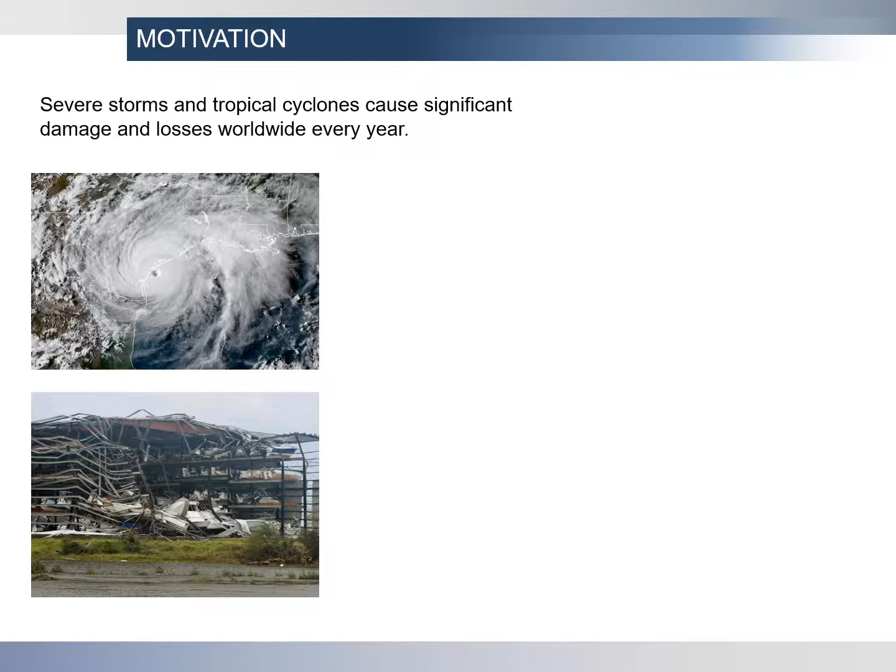Every year, many regions around the world are affected by severe storms and tropical cyclones. Damage to structural and non-structural components have summed up to a very high economic loss. For example, the U.S. has lost almost $300 billion to wind-related events in 2017, and this is 10 times more than losses to other natural disasters combined in that year. This has motivated engineers and researchers to find ways to improve structural integrity.

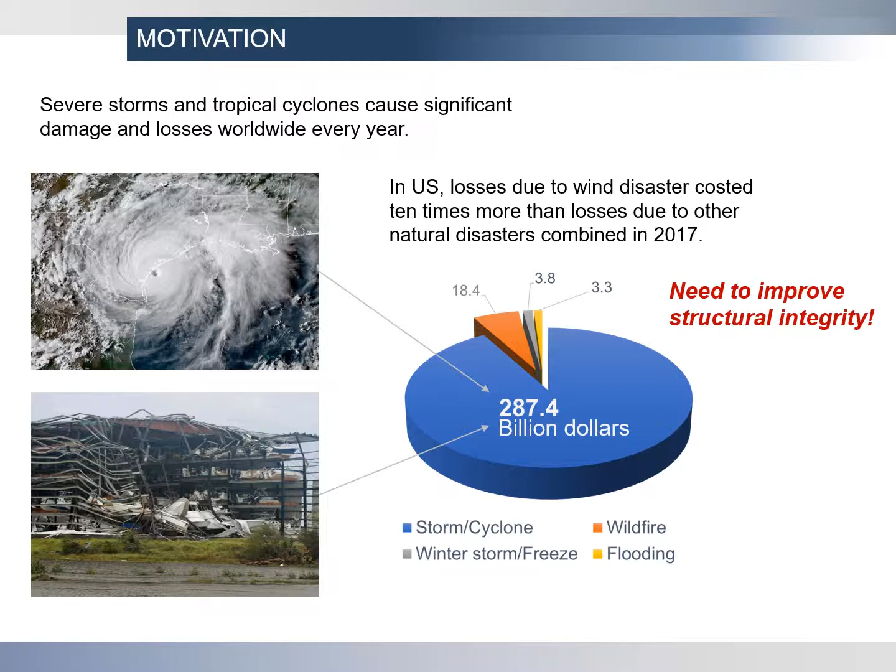However, high-performance designs are more likely to result in higher initial cost, and therefore it is also important to identify the optimal compromise between the upfront construction cost and risk mitigation.

To ensure system performance, performance-based design approach can be used to evaluate system performance in terms of expected loss and variability in the system level loss, which is the indication of robustness of the system. At the same time, optimization technique can be used to identify feasible designs with a minimal upfront cost.

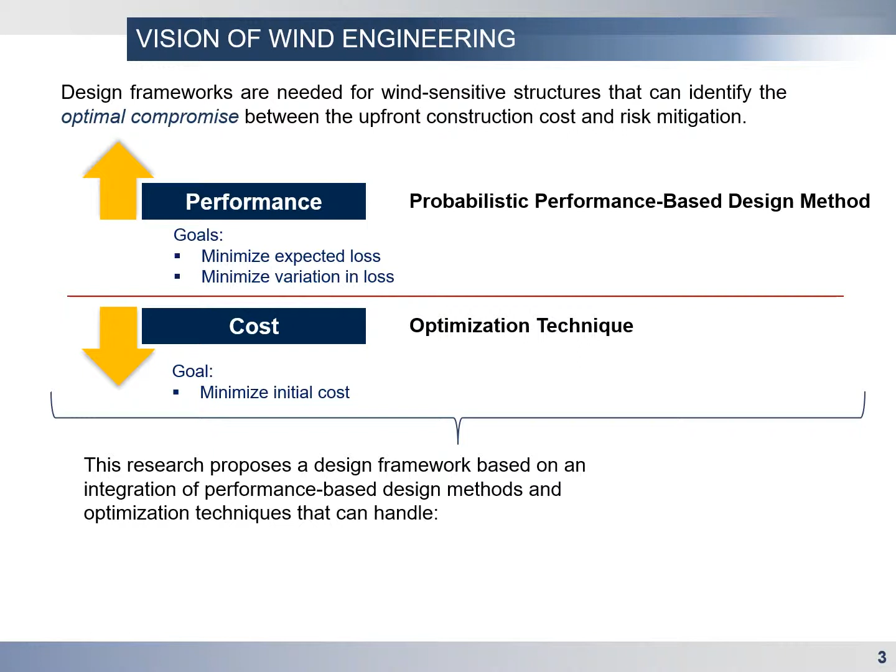This has brought us to the proposed design framework that is based on integration of performance-based design methods together with optimization technique that can handle multiple objectives, uncertainties in the systems, and a large number of design variables.

Due to the conflicting nature of the initial cost and anticipated loss, it would be very useful for decision makers to see the complete picture of trade-offs through the Pareto optimal solutions. Hence, it is of interest here to solve optimization problems in the multi-criteria setting.

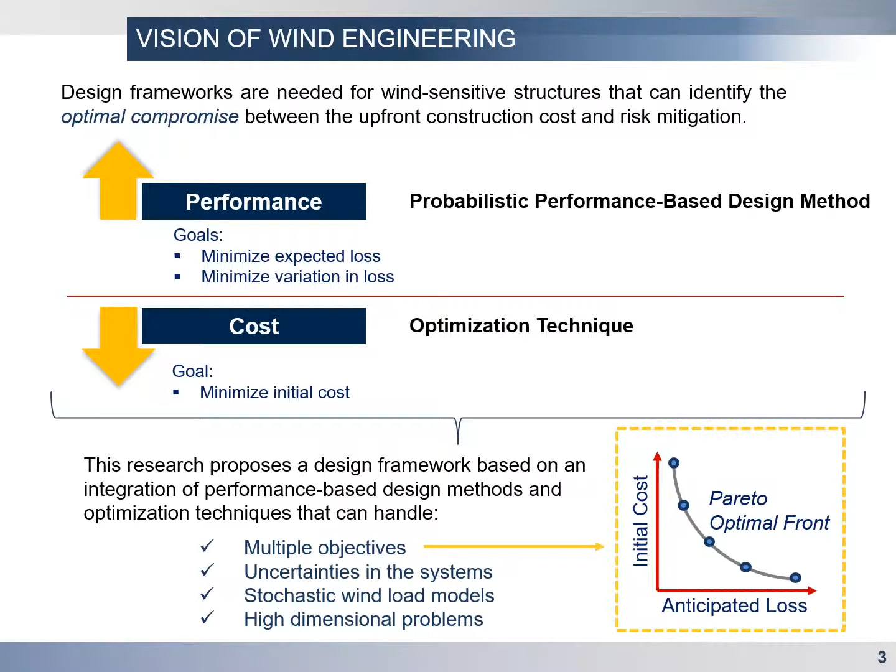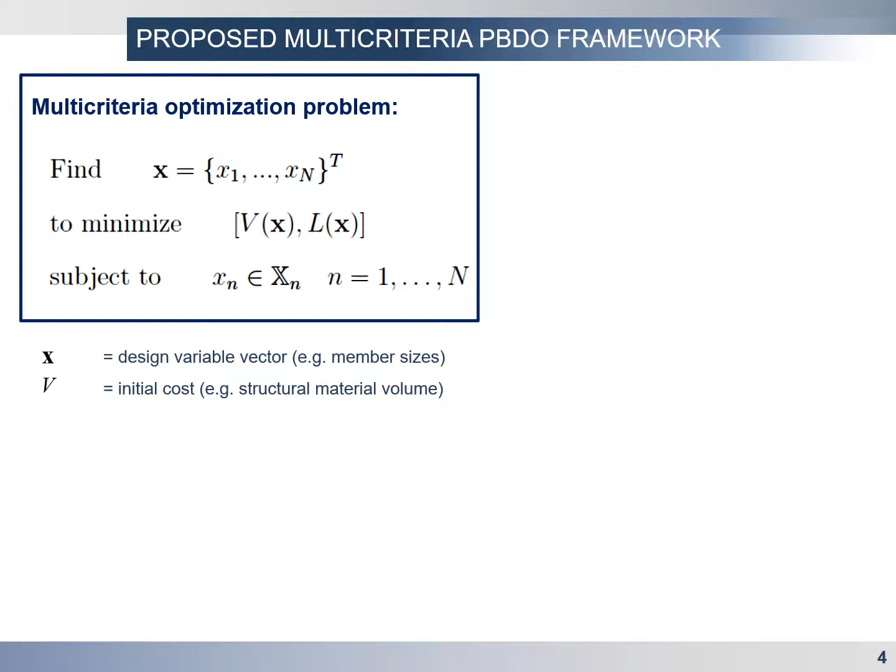The multi-criteria optimization problem may be formulated as follows. X is a high-dimensional vector that collects design variables such as member sizes. V denotes the cost function, which may be taken as structural material volume.

L represents loss measure, defined here as the combination between the expected value and the standard deviation of the decision variable, such as the total repair cost.

A parameter alpha is introduced here as a robustness parameter that allows decision makers to choose the level of robustness that they prefer. The higher value of alpha results in tightening the variability of the system level loss and therefore leading to a more robust design.

To estimate the expected value and standard deviation of the system level loss, performance-based wind engineering frameworks can be used. Starting off with identifying the intensity measure through the hazard analysis, then we perform aerodynamic analysis to estimate the wind loads on the system.

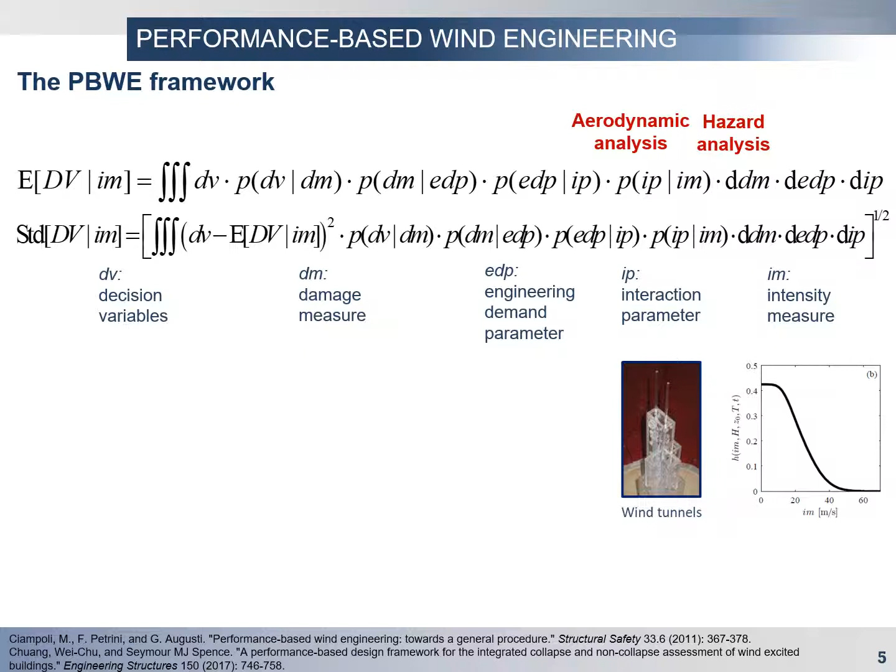Followed by structural analysis to estimate the responses and engineering demand that will be used in identifying damage to the components in the system. By summing up all components' repair cost and time, the total repair cost and repair time can be estimated.

This allows us to estimate the system level expected loss as well as the standard deviation, which tell us how the total loss varies around its mean value.

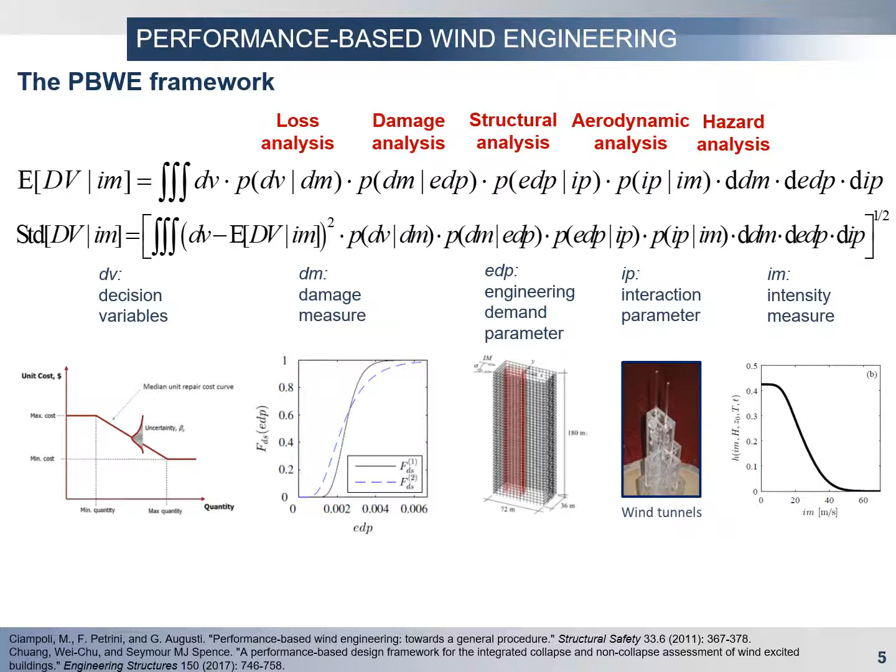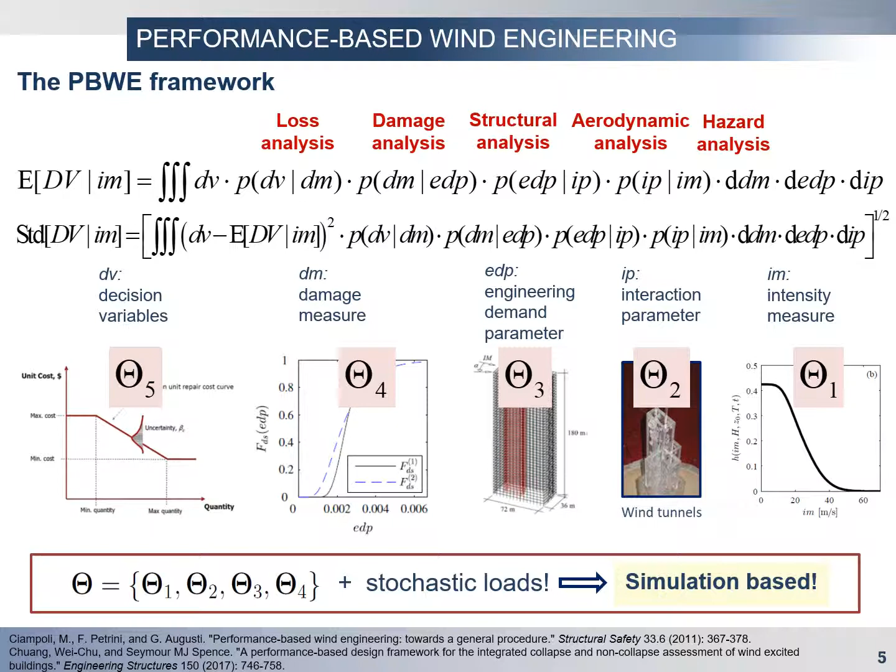It is also important to account for all uncertain parameters involved in all analysis steps. Together with stochastic wind load, these integrals can end up having thousands of dimensions, and therefore it is proposed here that they should be solved using numerical simulation.

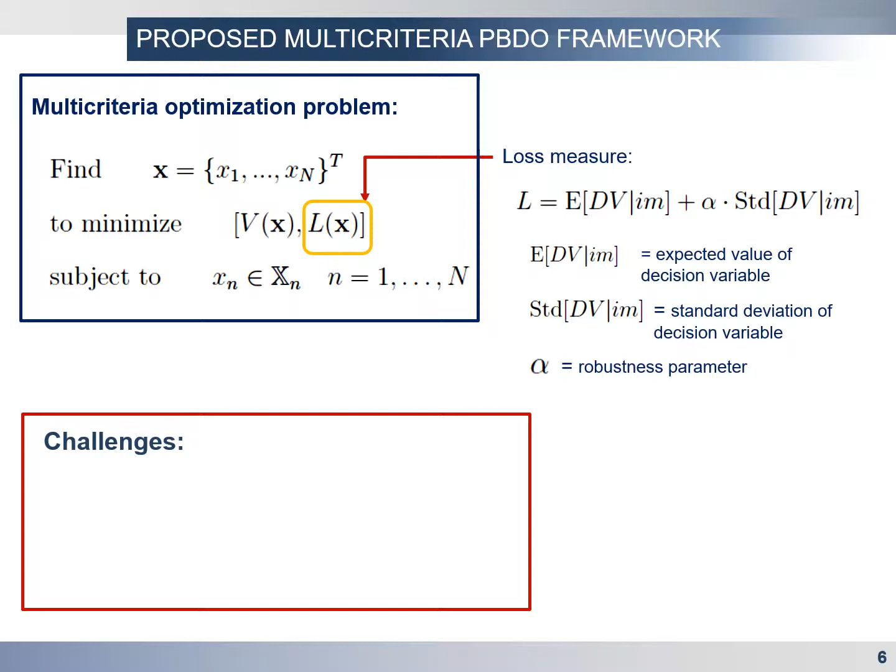This optimization is very challenging to solve because not only does it involve multiple objectives, but also one of the objective functions is in terms of the probabilistic loss measure that requires a time-consuming simulation. And for practical systems, X is also high-dimensional.

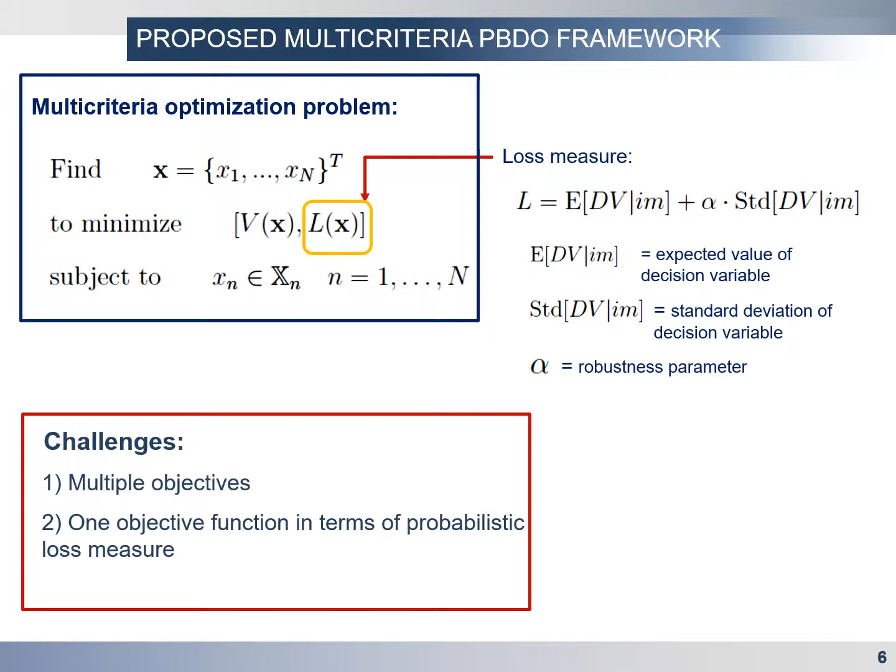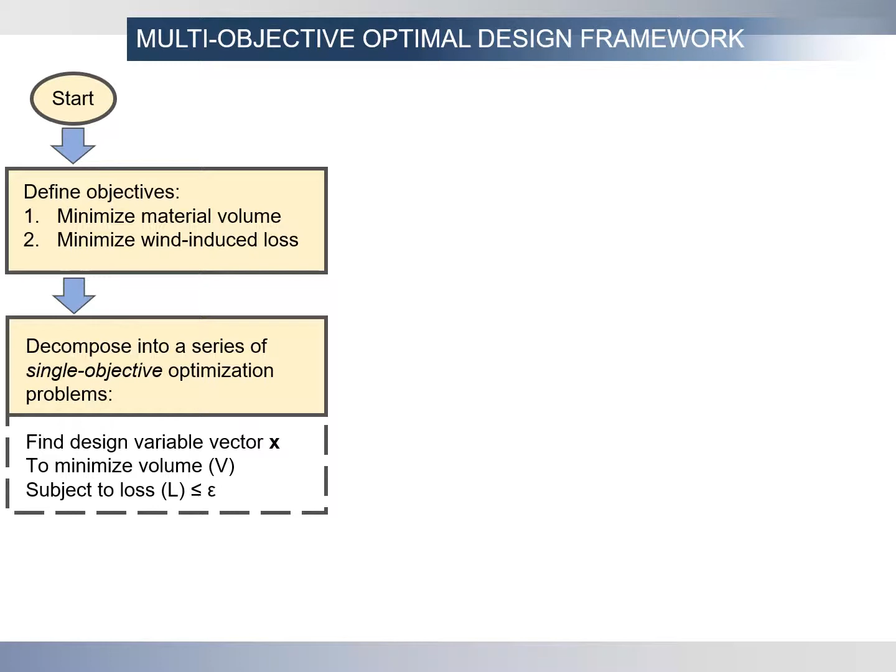To solve this problem, we first decompose the original multi-criteria problem into a series of single-objective optimization problems through the epsilon constraint approach. For each epsilon constraint problem, the simulation-based performance assessment is nested within the optimization process, so it is still time-consuming when we have to carry out a Monte Carlo simulation for every candidate design.

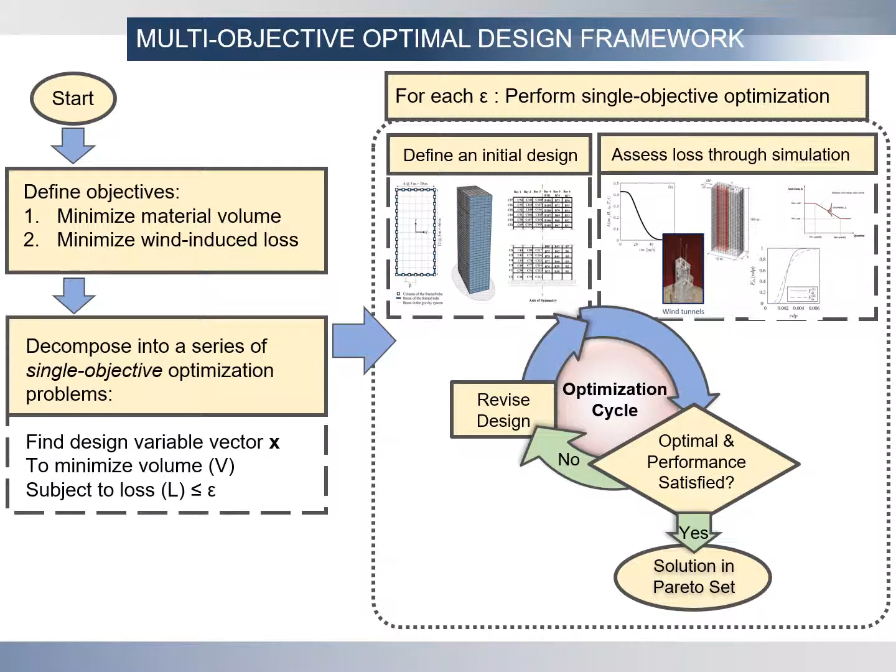To efficiently solve this single objective problem, we would like to decouple the simulation from the optimization process through defining an approximate optimization subproblem. In particular, we would like to have a computationally cheap approximation scheme to estimate the loss measure as the design changes.

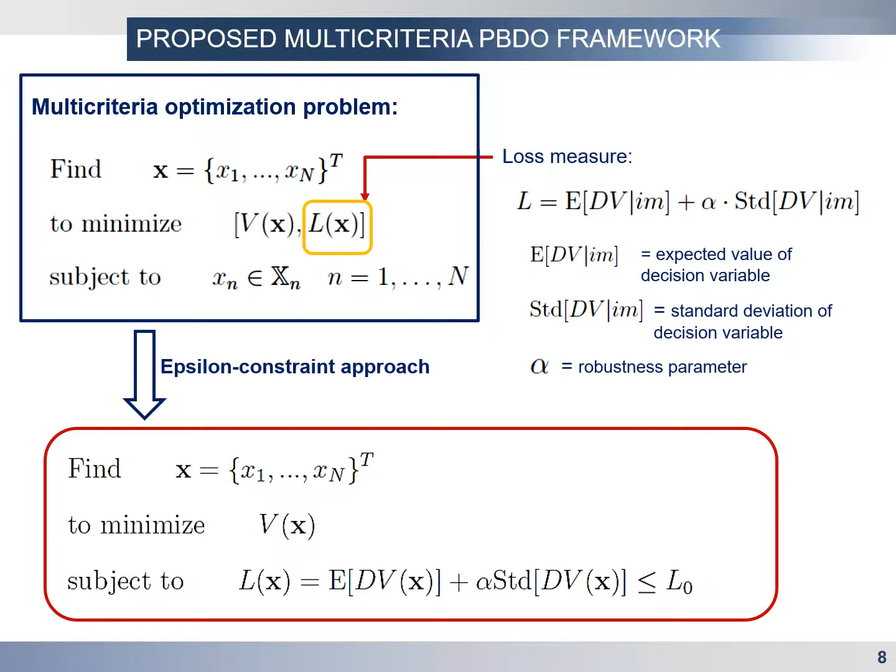To do so, it is proposed here that the problem can be divided up into 3 steps. The first relates design variables to the mean and standard deviation of the engineering demands, which are then related to the mean and standard deviation of the loss in the corresponding performance group, referred to here as the group level loss. Then the mean and standard deviation of the group level losses are related to the expected value and standard deviation of the total loss of the system.

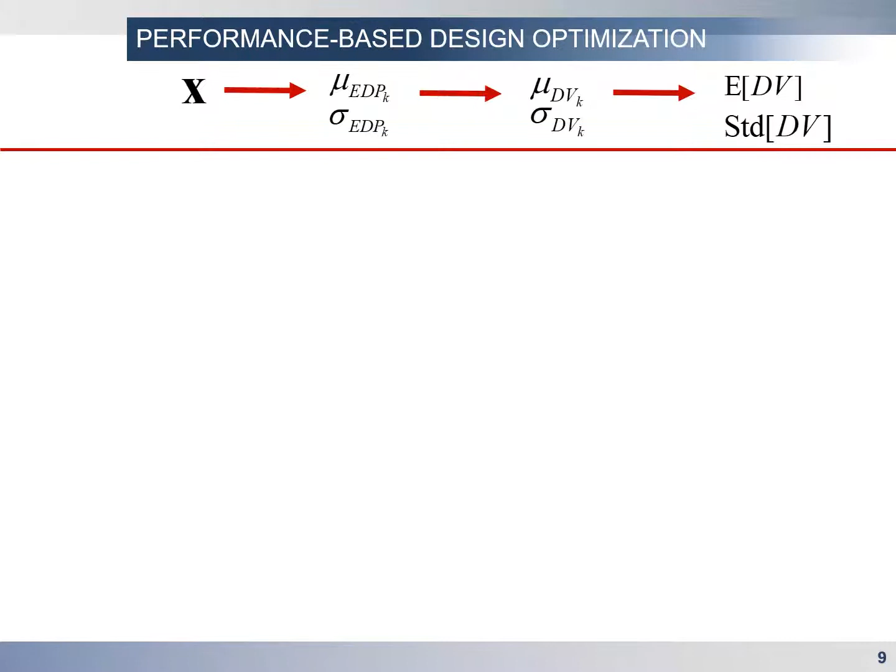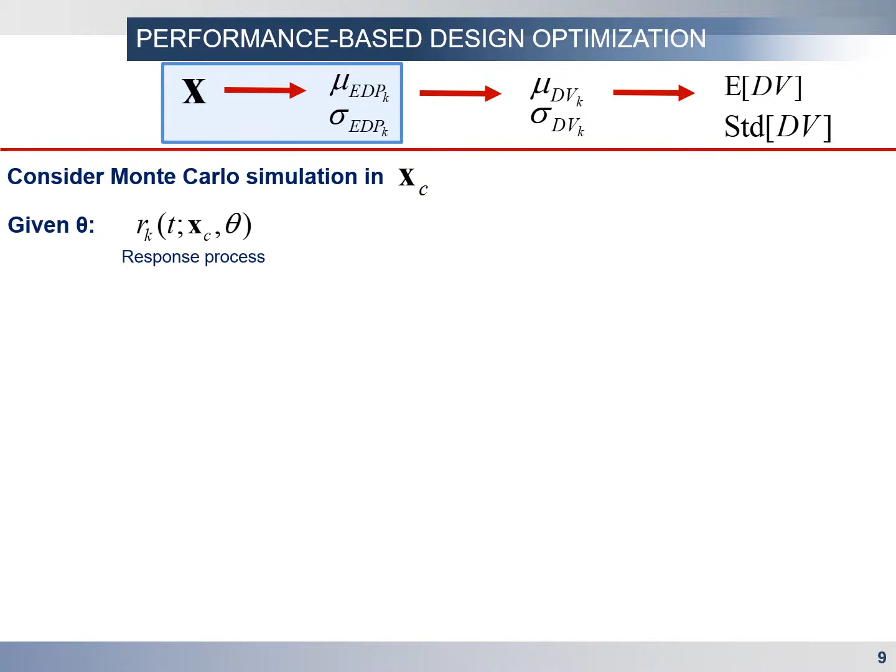For the first step, let us consider the simulation in the current design point. For a given realization of uncertain parameters, we can generate a sample of response process, a sample of engineering demand, and also a sample of vector value stochastic process.

Based on these samples, we can define the following probabilistic variable, which can be used to estimate the auxiliary variable vectors, or the AVVs, as the byproducts of the simulation.

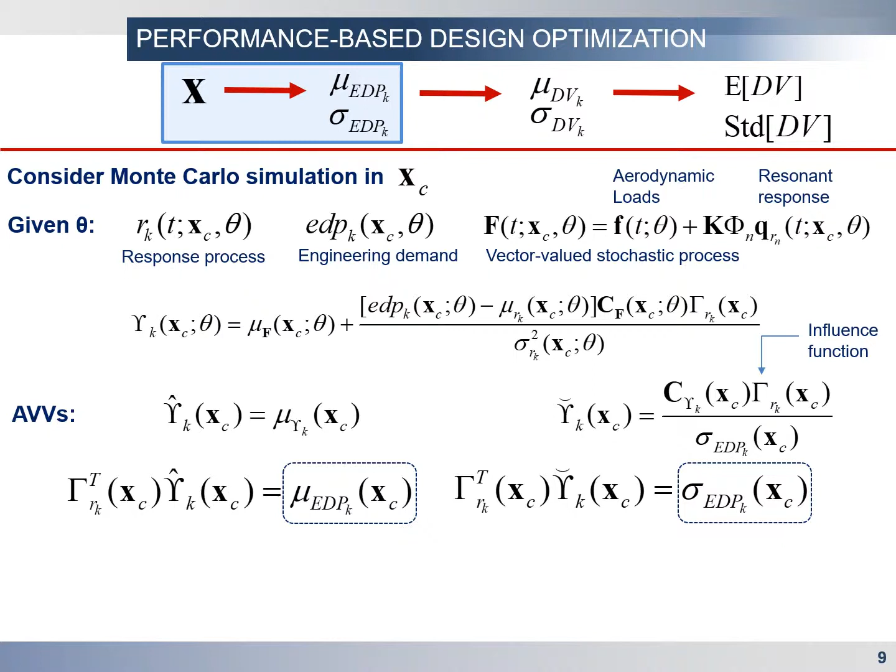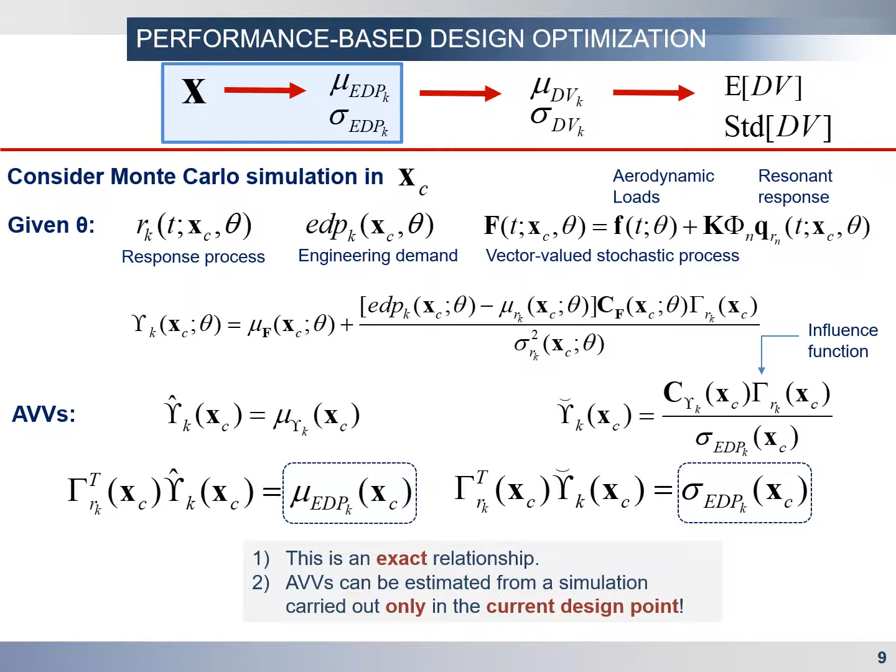The interest in estimating these AVVs is that when they are statically applied to the system, we obtain the response exactly in terms of the mean and standard deviation of the engineering demands. This is an exact relationship that is explicit in X and requires a simulation only in the current design point.

Second step: to relate the second-order statistics of the demands to the second-order statistics of the group level loss, we observe that from the simulation in the current design point, we have samples of engineering demands which can be manipulated through the following transformation to obtain a new set of samples with the corresponding mean and standard deviation that we are interested in.

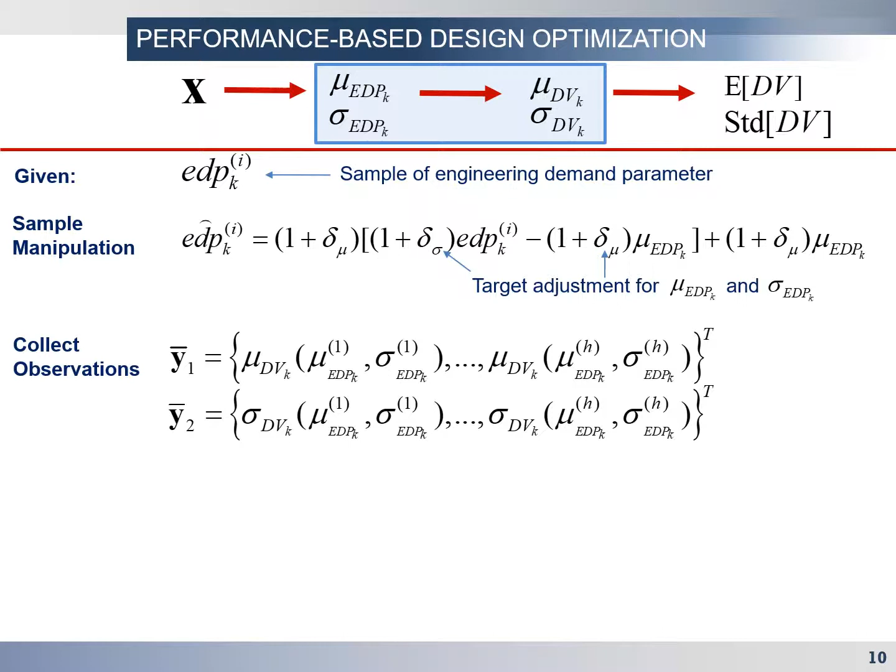We can use this new set of demands and perform only the damage and loss analysis again to generate new observations of the mean and standard deviation of the group level loss. After collecting some observations, kriging models can be constructed that predict the mean and standard deviation of the group level loss in the space of the mean and standard deviation of the demands.

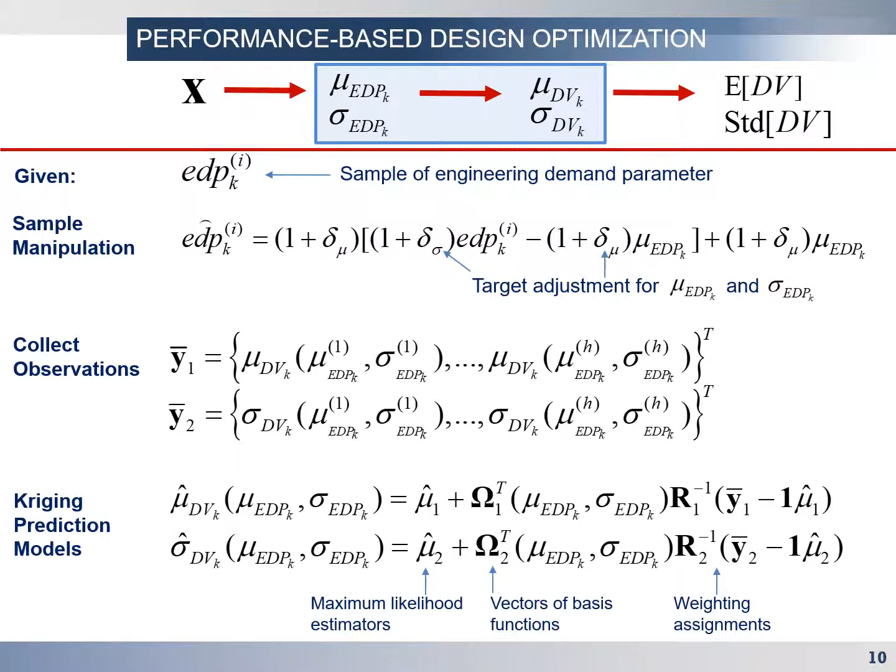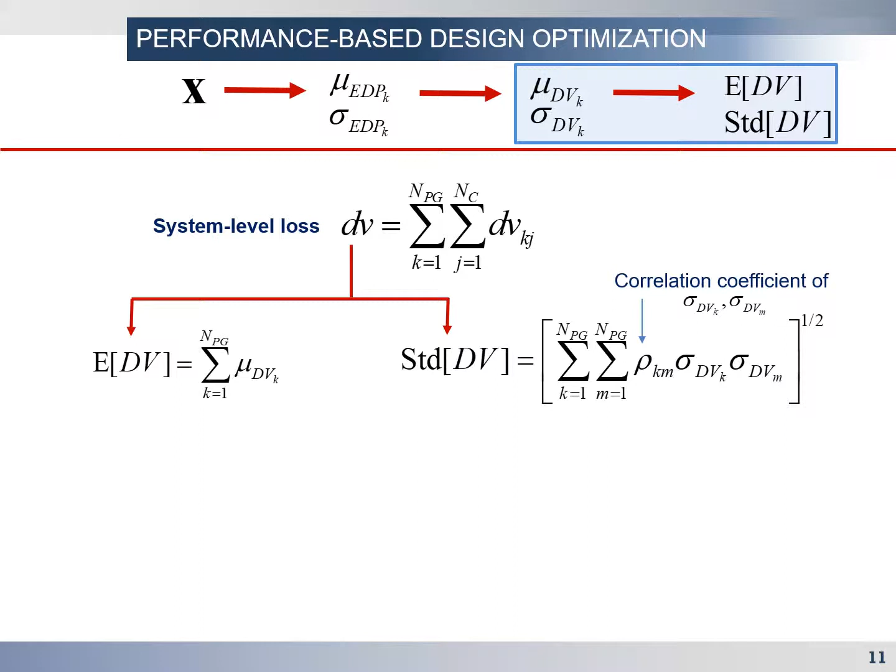The last step is to connect the group level losses to the system level loss. Because total loss can be written as the summation of component losses over all performance groups, the expected total loss can be calculated as summing all mean values of the group level losses, while the standard deviation of the total loss can be calculated in terms of the correlation coefficient and standard deviation of the group level losses. From here, we can substitute in the kriging models to quickly approximate the expected value and the standard deviation of the system level loss.

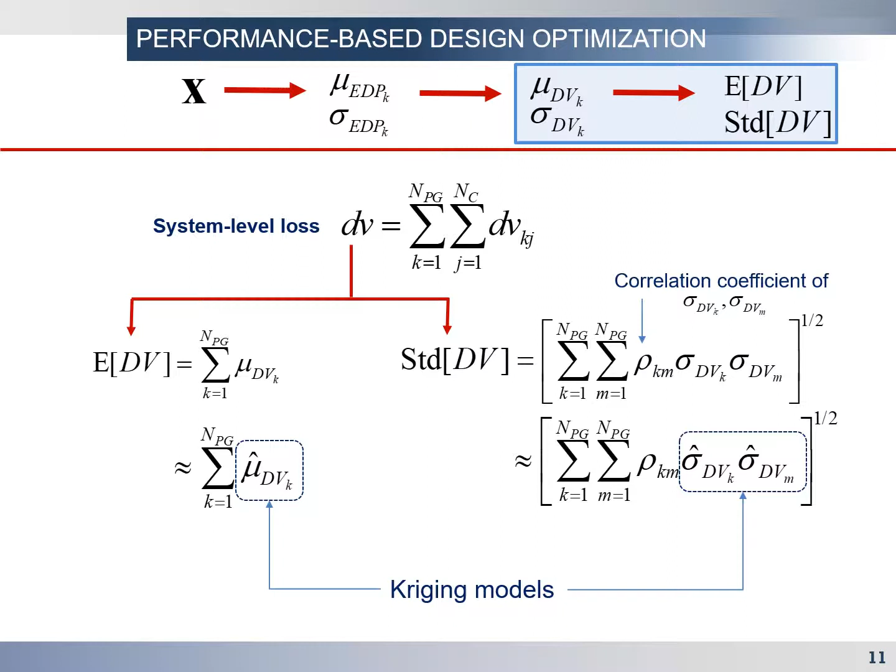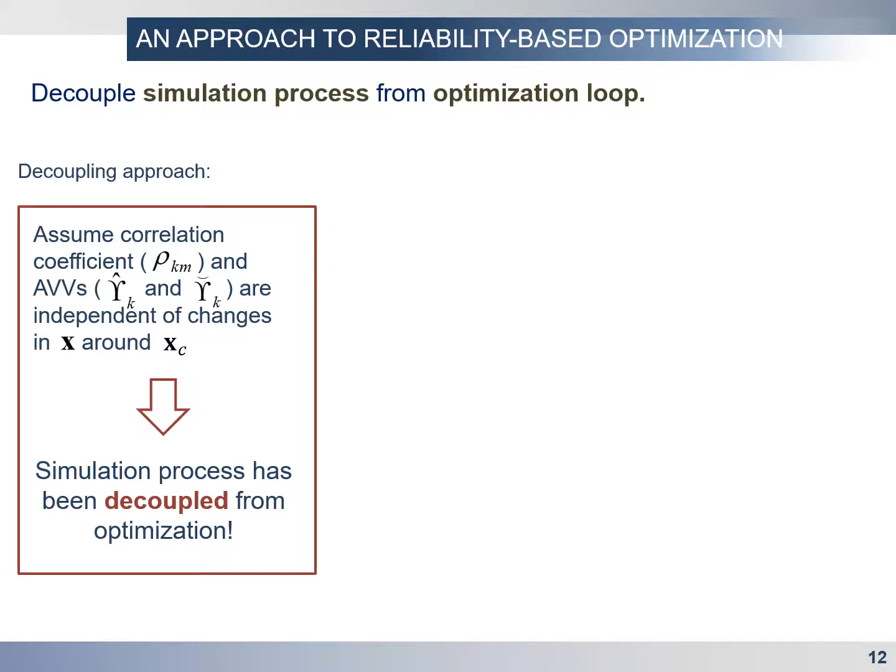Now, if we assume that the AVVs and the correlation coefficients between group level losses are independent of changes in X, then the probabilistic analysis is decoupled from the optimization process, and therefore the original epsilon constraint problem can be solved through a sequence of static, simulation-free optimization subproblems. In particular, gradient-based algorithms can be used here.

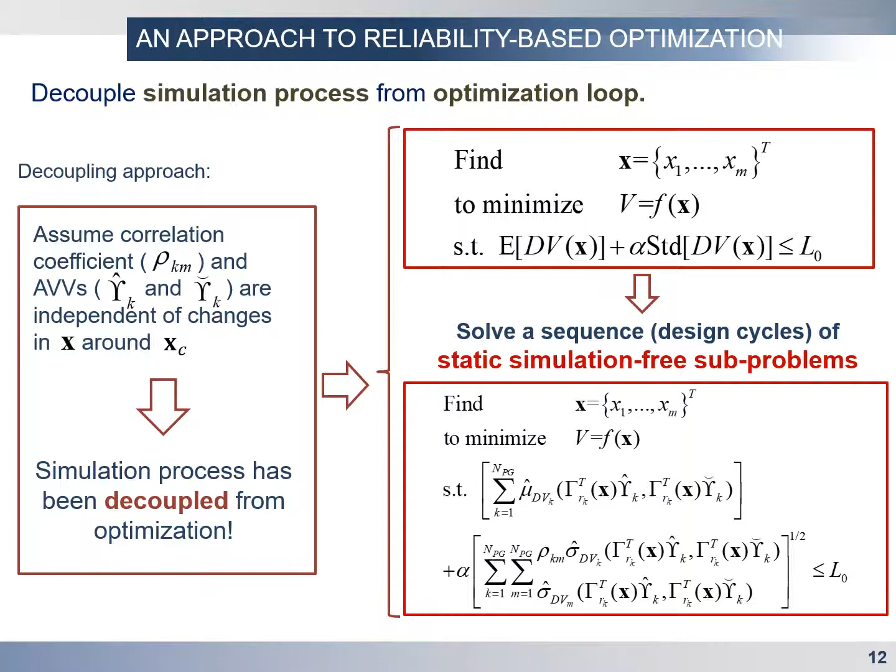To quickly test the potential of the proposed approach in solving a single-objective optimization problem, the test problem here is to design a two-story frame which consists of 4 design variables, 2 performance groups, with each group having 32 cladding components that are susceptible to peak story drift ratio, and have 3 possible damage states.

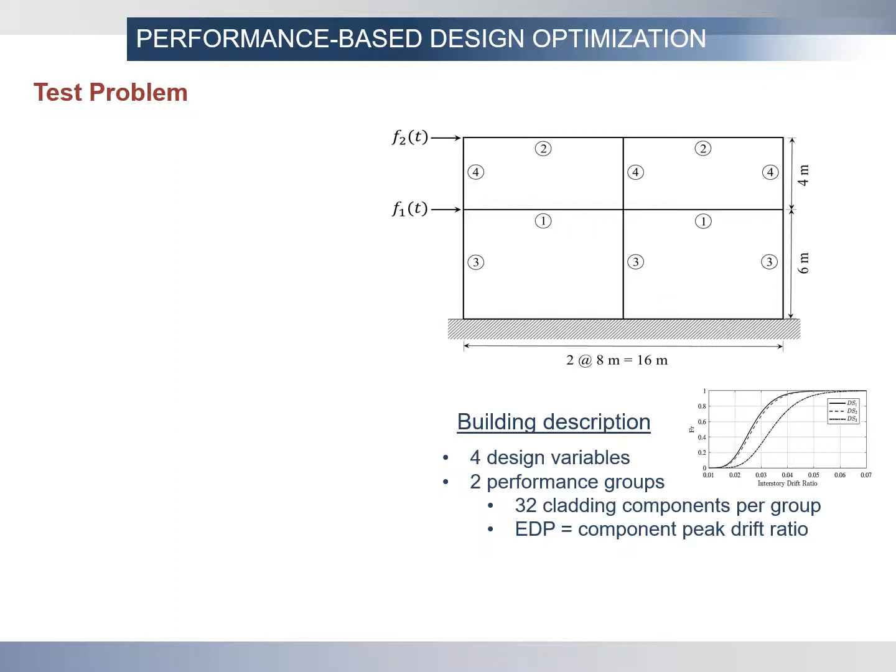The frame is subject to stochastic wind loads that were generated using the quasi-static wind model, with a wind intensity measure taken as the wind speed with the mean recurrence interval of 1700 years. The performance objective here is to ensure that the sum of the expected value and standard deviation of the total cost does not exceed $50,000.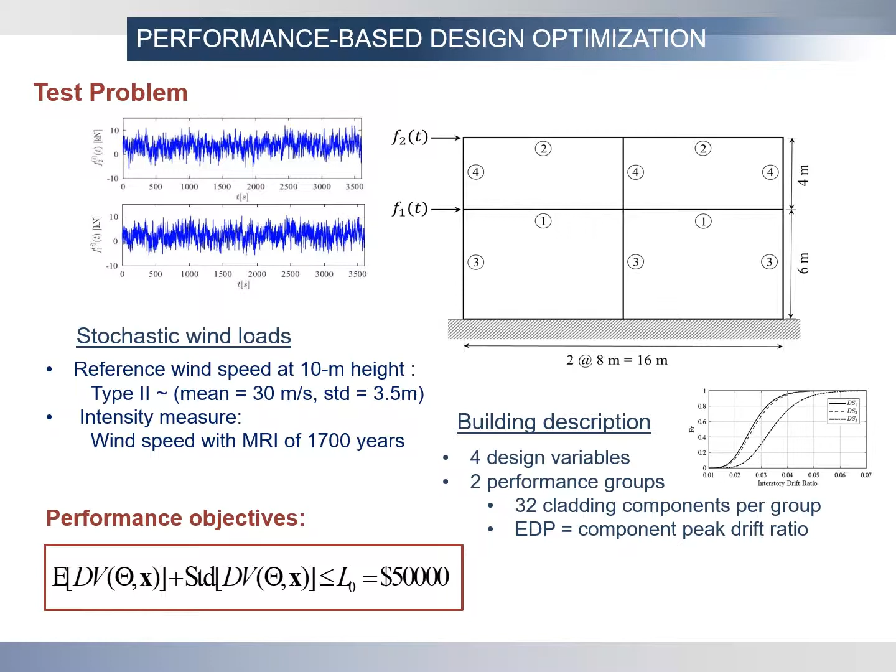We apply the framework and obtain the following result. An example of a kriging model is presented here, showing the global approximated surfaces of the mean and standard deviation of the group level loss, and how the regions where the optimal solution exists are quickly identified within the first cycle.

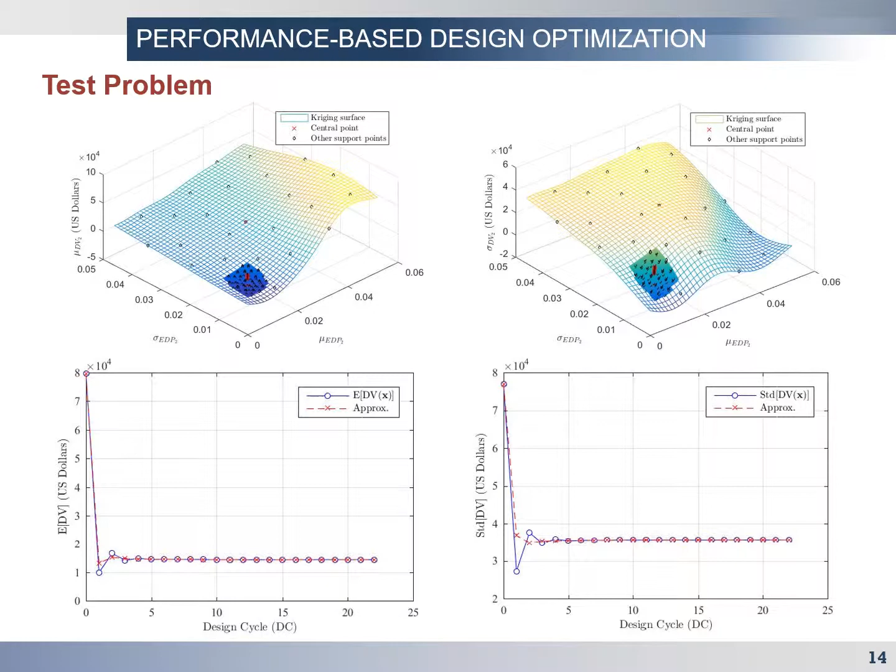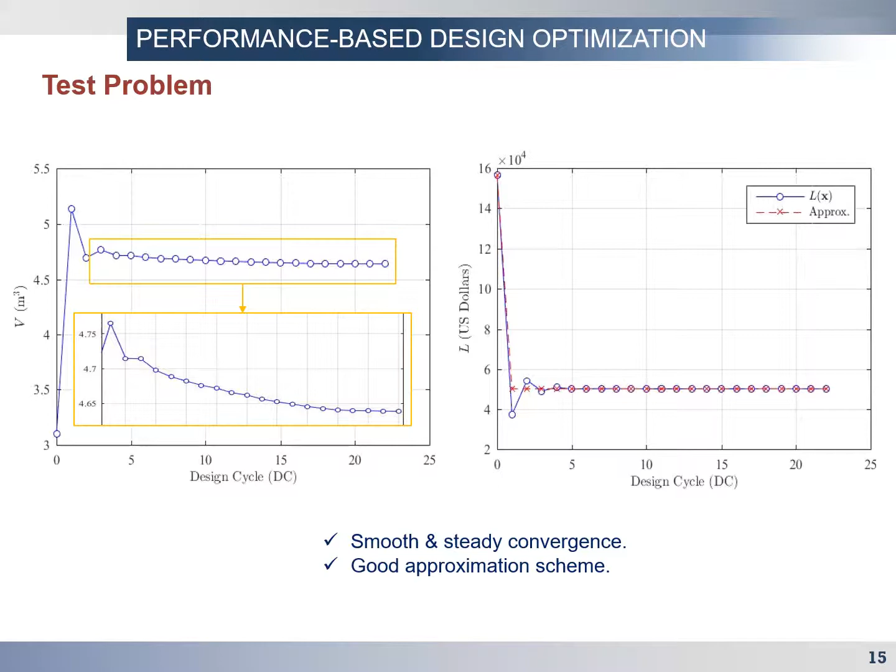The accuracy of the approximated expected value and standard deviation of the total loss is shown to be very accurate throughout sequential updating. The objective function is minimized with smooth and steady convergence properties, while the constraint satisfies its target within the first few cycles. This strongly demonstrates the potential of the framework.

To investigate the applicability to a multi-criteria optimization problem, a case study is carried out on a large-scale system that consists of more than 250 design variables and 37 performance groups of cladding components susceptible to maximum peak story drift from along-wind and across-wind response processes. The system is subject to stochastic wind loads generated based on a wind tunnel-informed POD model.

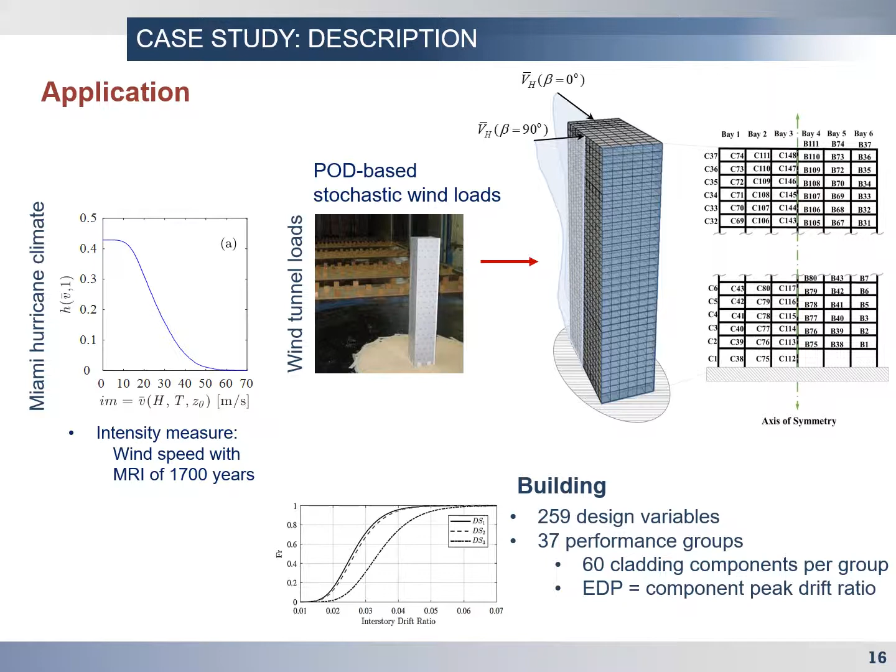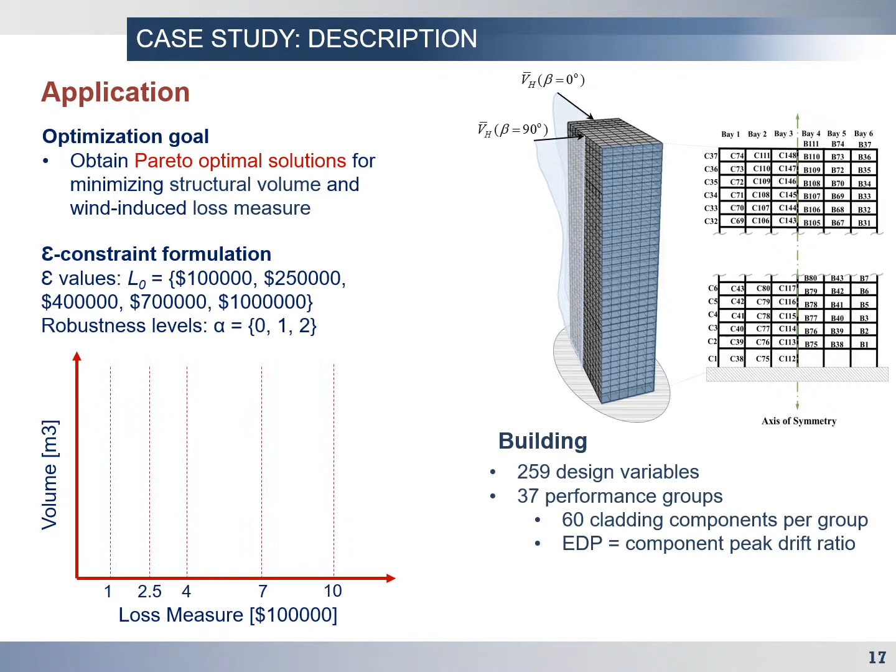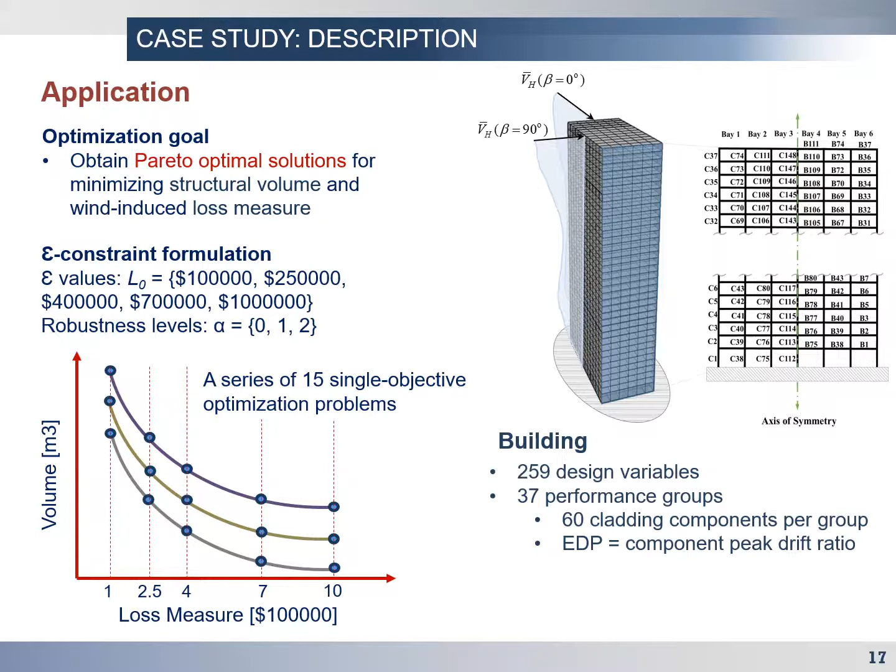The optimization goal here is to obtain Pareto optimal solutions for minimizing structural volume and loss measure. In formulating the epsilon constraint problem, 5 loss threshold values were considered and 3 levels of robustness were investigated through varying values of parameter alpha. Therefore, a series of 15 single-objective optimization problems were solved through the proposed adaptive kriging-based approach.

And here are the results. The first figure shows sets of Pareto optimal fronts in the space of the two objectives. As expected, anticipated wind-induced loss is higher for systems with lower initial cost, and a higher initial cost is required if a higher level of alpha is chosen for a more robust design.

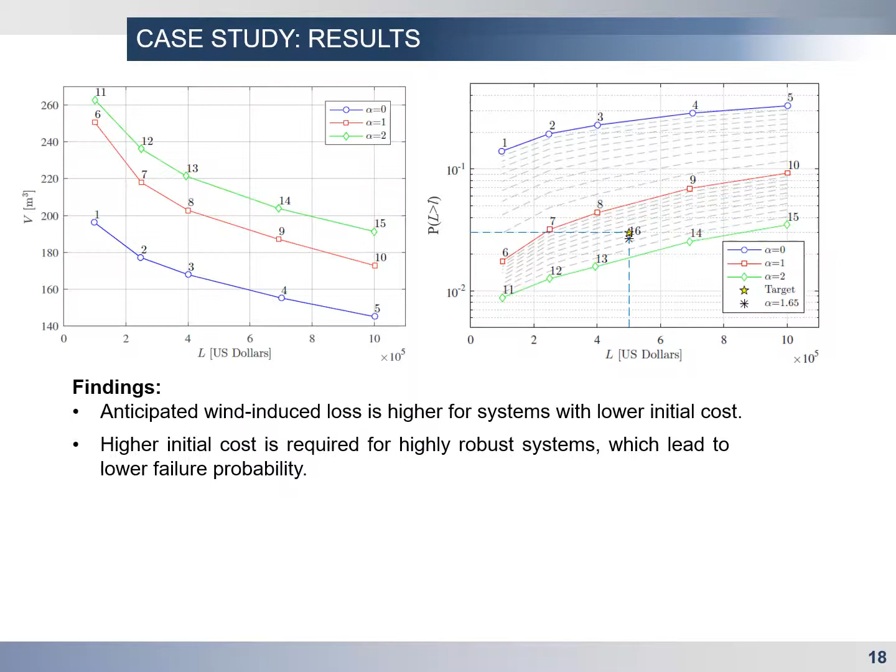Moreover, results from the Monte Carlo simulation carried out for each of the optimal points can be used to estimate the associated probability of exceeding a given loss threshold, as illustrated in the second figure. This not only provides a more complete picture of the system performance, but it also provides a means for decision makers to identify which value of alpha to consider in order to choose the optimal trade-off solution.

For example, if the stakeholder is interested in the optimal design that has the probability of having a loss measure exceeding $500,000 to be less than 0.03, the corresponding alpha value is interpolated to be around 1.65. An additional single objective optimization can be carried out to obtain the corresponding optimal design.

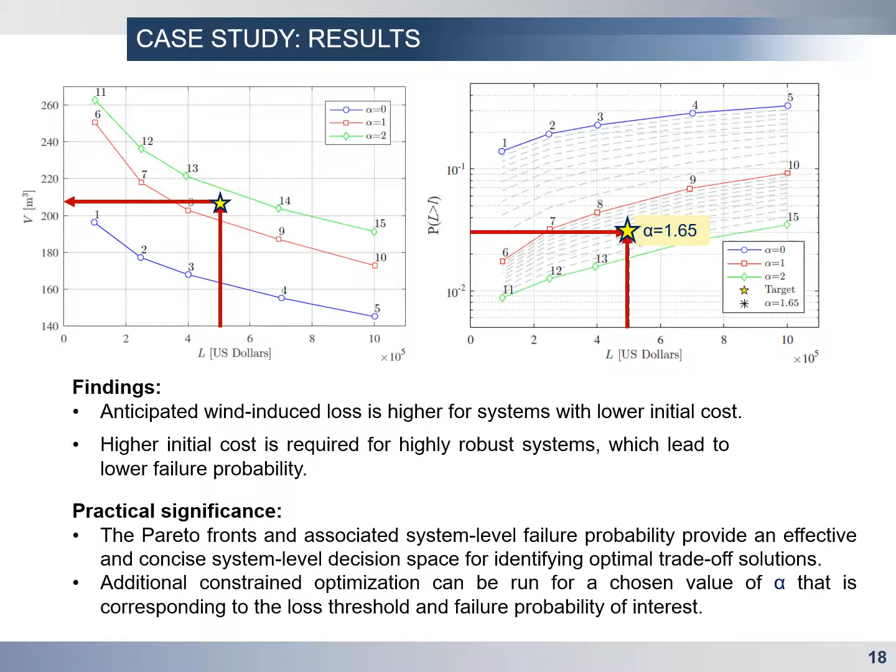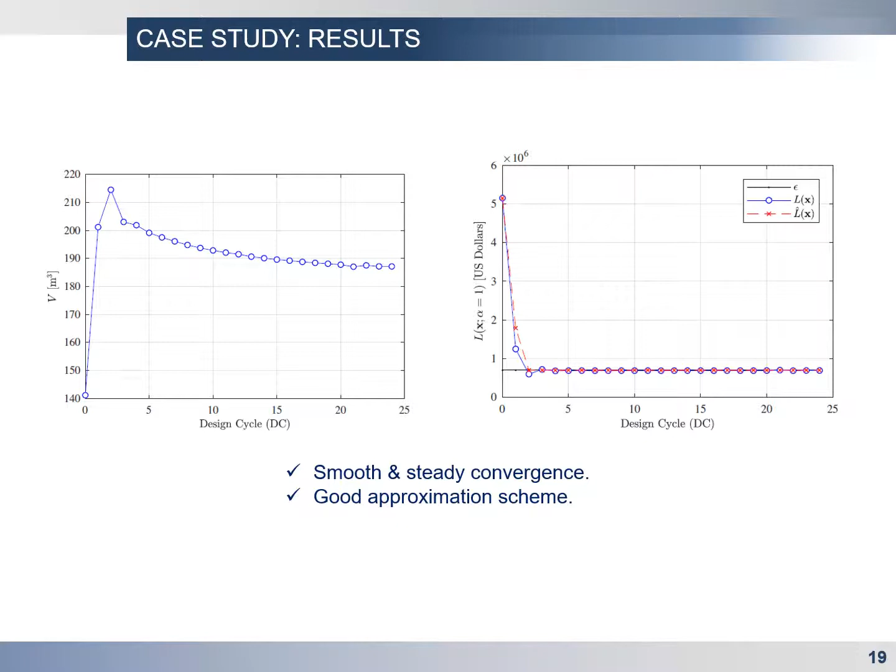Approximation of system-level loss measure is shown to be very accurate, especially after constraints were satisfied. And this truly highlights the scalability of the proposed method.